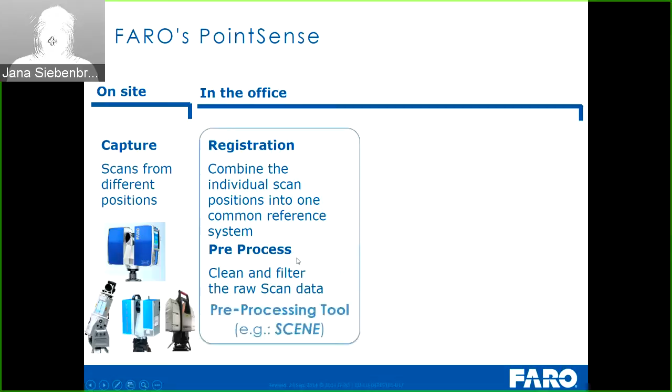Relating to scans, you will, in the office, or some may also already register their scans in the field - that means registration, you combine the individual scan positions into one common reference system - and also in the office you can pre-process the scan data. Pre-processing means that you clean and filter the raw scan data, and usually you would use a pre-processing tool like, for instance, FARO Scene to do so.

The post-processing, meaning interpretation and modeling, is usually done in a design tool like Revit or AutoCAD, and our PointSense is a plugin for AutoCAD. To get the data into AutoCAD and PointSense, you may directly export RCP or RCS files from FARO Scene, or you can also export E57 from any other scanner software, or you can use Autodesk Recap in order to create RCP or RCS point cloud files from your scan data.

So today we are talking about PointSense - interpretation and modeling of point clouds, not only from laser scans. FARO offers various tastes or flavors of PointSense.

There are some industry-specific PointSense products like PointSense Building for creation of 2D plans of buildings, like floor plans, section plans, and elevations. Then we have PointSense Heritage, which combines laser scanning and photogrammetry and is mainly meant for people working in archaeology and preservation of historical sites. We also have PointSense Plant, which will be covered in a separate webinar, as already mentioned.

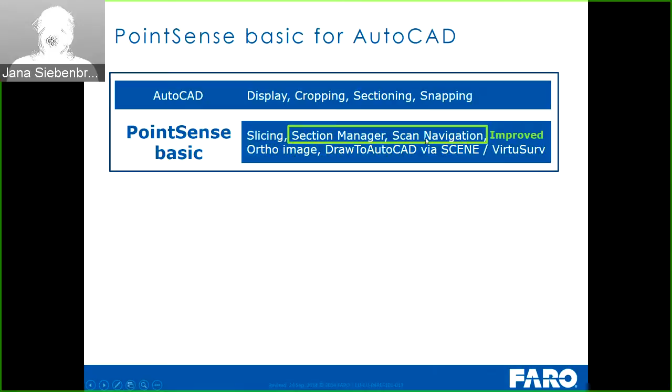We have in PointSense Pro some additional features like feature extraction for lines, polygons, planes, cylinders, and we have also some analysis tools in PointSense Pro. And as new features, we have added to PointSense Pro the Smart Snap feature. You will learn about it in a few minutes. And we also added a fit profile feature and some deviation visualization.

And also in the industry solutions of PointSense for AutoCAD, in PointSense Building and PointSense Heritage, we added new tools. Those industry solutions contain the functionality of PointSense Basic and Pro, plus additional functionality, like here in PointSense Building, tools for creating 2D floor plans and elevations, to draw doors, windows, stairs, etc., and do some area calculation.

And as a new tool, we have a prototype for aligning wall lines. You will learn about this as well in this webinar. We also improved the tool for creating the wall lines themselves.

In PointSense Heritage, you get, in addition to those PointSense Pro tools, tools for stereo photogrammetry and for creation of image plans by unwrapping colorized point clouds into the plane. You will learn about this tool also in this webinar. We did some improvements there. They are not new tools. We have them for quite a while now.

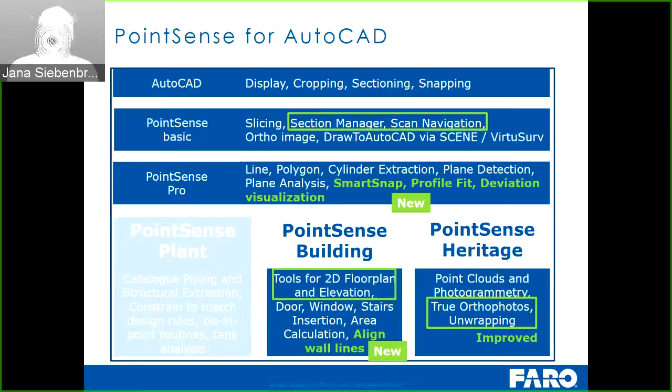And some of you might also be interested in which AutoCAD versions the new version of PointSense is compatible with. So we have here a list of the supported operating systems and AutoCAD versions. We always support the latest AutoCAD version, which is now 2017, and also the verticals of this AutoCAD version, and the new version of PointSense also supports older versions of AutoCAD, starting with version 2013.

It does not support AutoCAD LT because we are relying on the native point cloud engine of AutoCAD, and LT does not have such an engine. All right. So far about the brief overview. Let's have a look at the new features and their benefits for you.

The first feature I like to mention is the Smart Snap, which is really new in version 17.5. It works like the known AutoCAD object snaps. With it, you can precisely snap to planes, corners, and edges of a point cloud. And we have also options that allow you to snap to the highest or lowest point within a certain search radius. The benefit for you is that Smart Snap allows you to draw and model the as-is situation much easier. You have far fewer clicks for getting corners and edges.

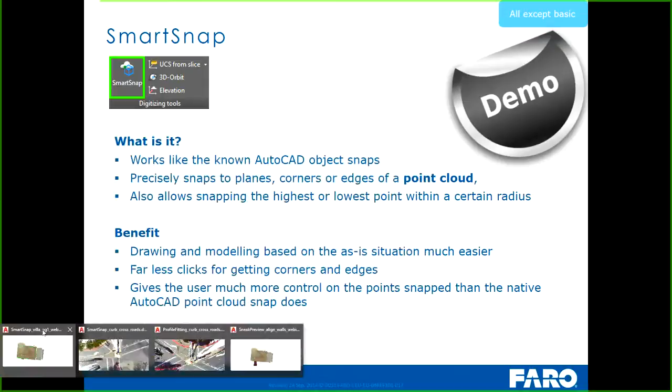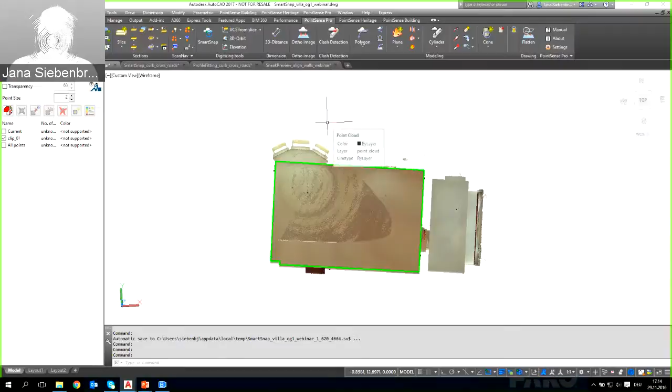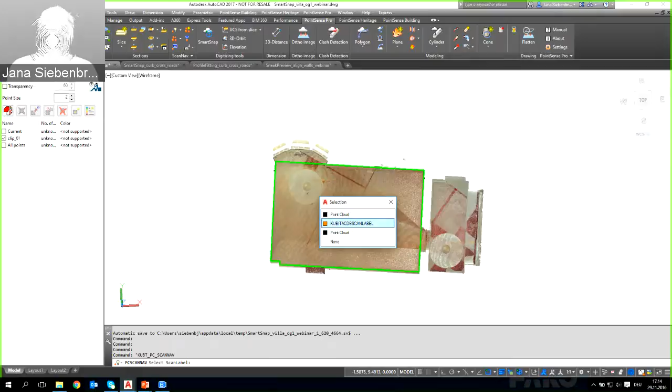So here you can see a point cloud, a scan of 2 rooms. I have already digitized the ceiling outline of the left room, and what I'd like to show you besides the Smart Snap tool is an improvement we made when switching to scan navigation. If I click on it, you will notice that now the point cloud becomes transparent, so it's far easier to click the scan label of the scan position which I want to go into perspective view.

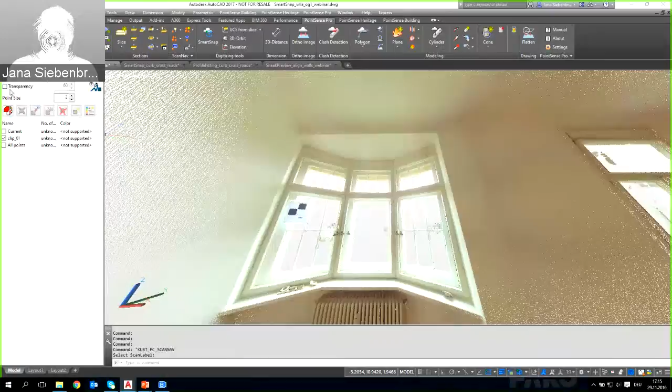So here we have our scan data now in a so-called scan navigation mode, where you look at your object from the scanner position. And what I'd like to do now is to digitize the outline of this window recess. One more thing I'd like to show you is a smaller improvement in the section manager, which some of you might know already. There, whenever you need to, you can turn on transparency.

Here you can see now the line that I have already digitized. For digitization of the recess, I will turn transparency off again. And I will start the new Smart Snap tool.

By running the tool, you will get an additional toolbar for the Smart Snap, where you can turn it on and off using this button. And you can also change between auto mode and manual mode. We have different types of snapping modes, like point to plane, corner point, edges and corners, or only edge points, and highest and lowest.

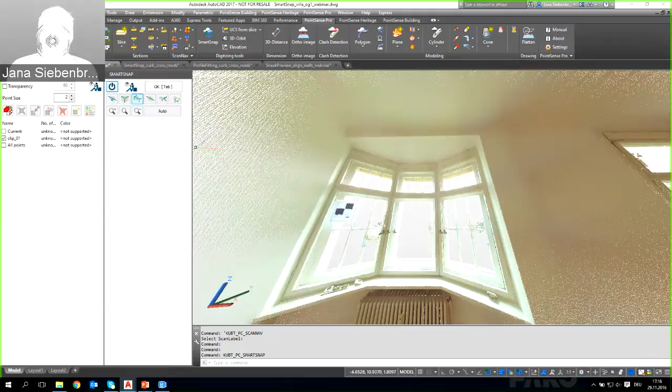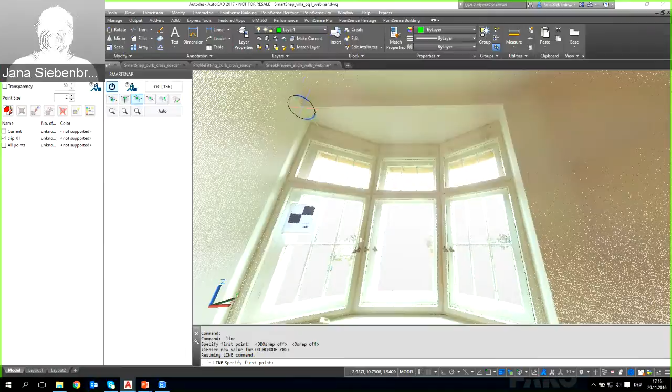Let's digitize the recess using the edge and corner snap. I would just draw a line to outline the recess. Let me just enable a colorful layer, and I start the line command, and you can see at my cursor, I now do have a circle around my mouse cursor, which represents the search radius. I can scroll it smaller and larger, just to analyze the points within a certain area.

And when I click near the edge or the corner point here, I do get a visualization where I can check. So the green point would be the point which I would get if I used auto mode, but the blue points show me some alternatives which I can check in 3 different views. And I think this one looks quite good in all 3 views, and you get additional axes that help you judge the quality of the proposed point.

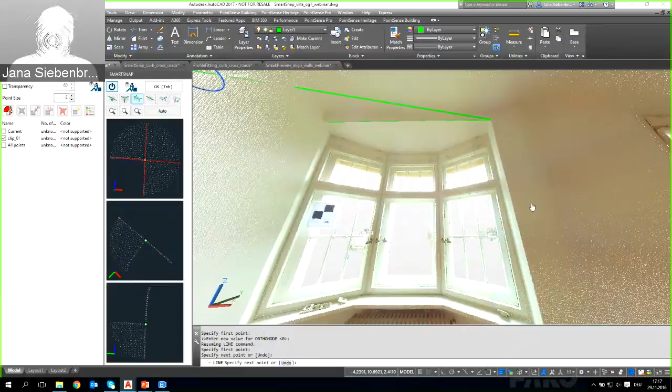And if I think this is the correct one, I can click on OK or use the tab button on my keyboard, and you see the line was snapped to that point, and I proceed with the next corner over here. Again, we can check. To me, it looks pretty good already. Let's see how this looks. Well, maybe even better. So I confirm, and I could continue down here and see what happens.

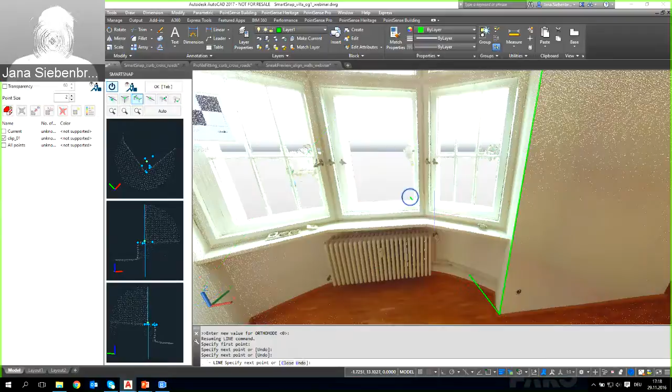This is a little bit more complicated situation down here, but still, I would like to get a point very close to here. This looks okay to me, and I can confirm here. So I think you get an idea of the usefulness of the edge and corner point snap.

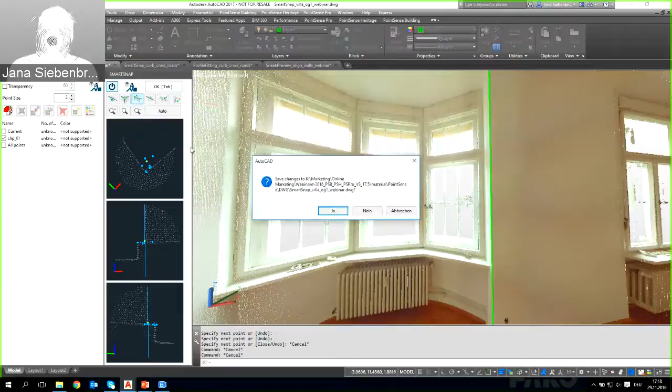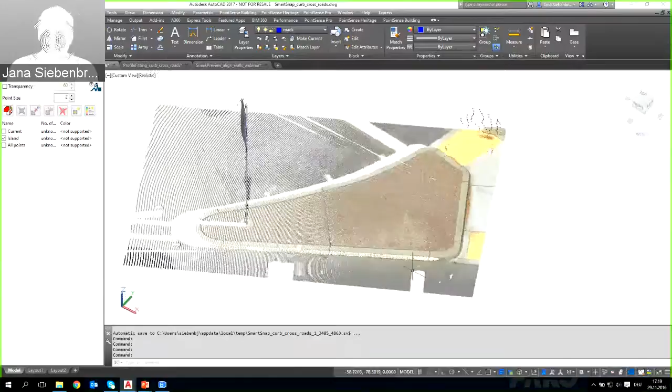Let me show you. We have 2 more options, like highest and lowest point snap. I will demonstrate these on a different example. Let me just close this drawing. Here we have scan data of a road cross section, and what I'd like to digitize is the bottom line of this curb using the Smart Snap. So I run the tool again,

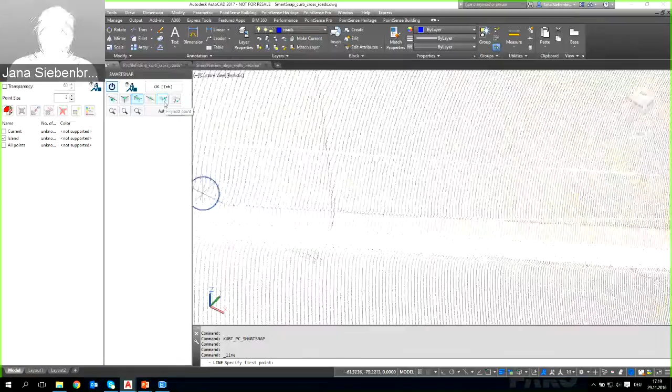and here I think I will start the line command once more, and I would need to snap to the lowest point within my search radius. So I enable the lowest point snap, and we have 2 options: the projected lowest point and the real lowest point. So now the projected lowest point is enabled, and this is also what I really need. Let me just increase the search radius a little bit,

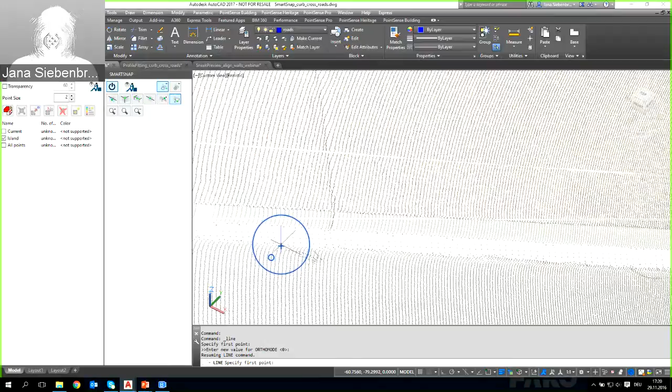and you can see a small blue cross inside my search radius, and you can also see a little circle. The little circle shows me the point with the lowest Z value within my search radius, while the blue cross shows me the point where I get my XY coordinates from. So I get the Z coordinate from the point with a small circle, and the XY coordinate from the point with a cross. So I can start drawing along here.

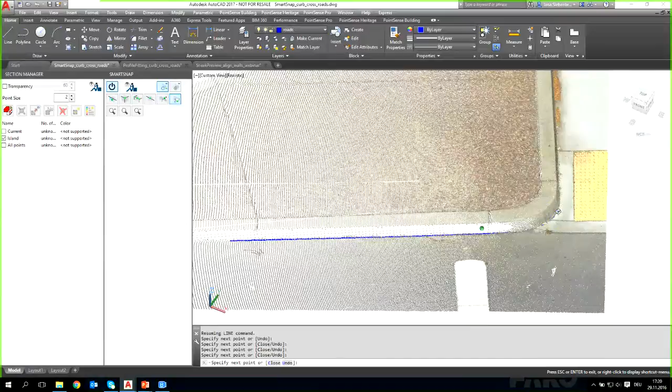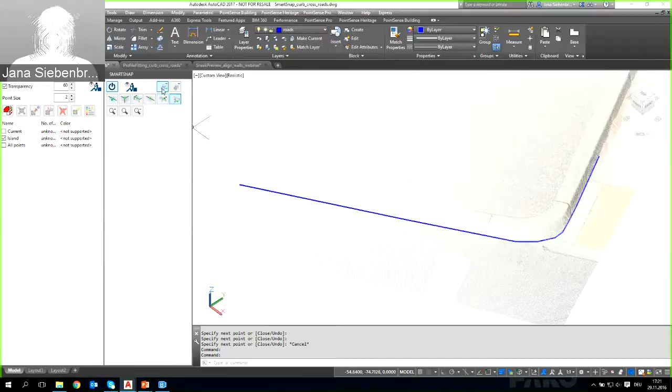Oops, I want to pan. Just click roughly around this corner. Quite straight on over here. Okay, I think that's enough for you to get the idea. We turn it a little bit more transparent, so you can see how easy it is to draw the bottom line of a curb. The same way I could do with the top of the curb using the highest point snap, projected highest point.

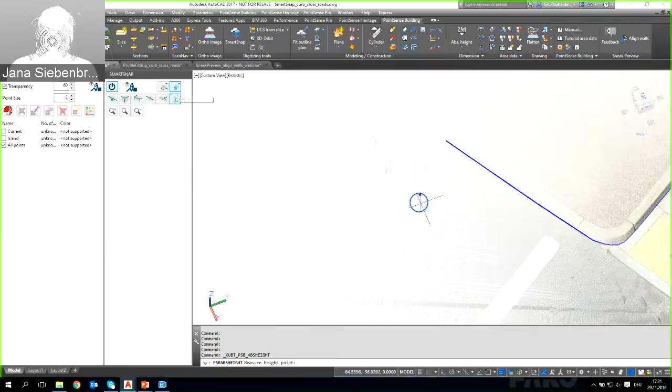I'd also like to show you how you can use the other mode, with the real lowest point. If you, for instance, want to know in a certain area of the road where the water will run to, you can, for instance from PointSense Building, start the labeling tool for heights or elevations, and with the Smart Snap now the real lowest point enabled, you can see that the symbol changes a little bit.

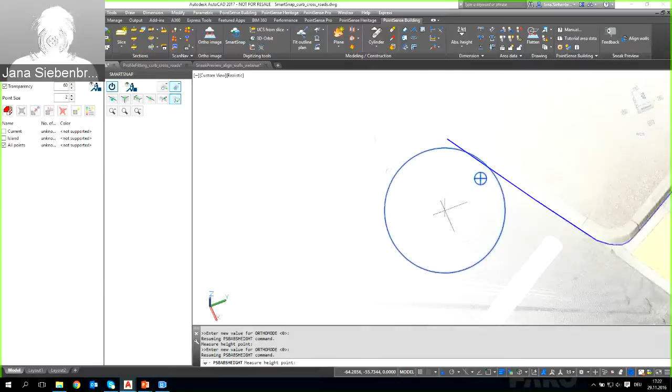The small blue cross is directly inside the small blue circle, which means that you get the X and Y as well as the Z coordinate from the lowest point within that larger search radius. So if I want to analyze a larger area, I can enlarge the search radius, and my height annotation will be put to that snap point. Okay, I think that should give you an idea of the Smart Snap tool.

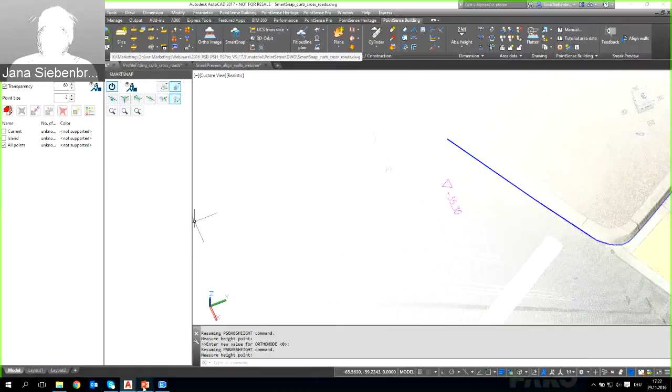I will just continue with the next feature, which is also new in version 17.5 of PointSense. It's included in all PointSense solutions except PointSense Basic.

It does fit 3D profiles along a point cloud, and shall help you to model all types of profiles in 3D, like the 3D model of a curb or of ornaments, or even if you have steel beams that bend, you can model those beams with this tool as well.

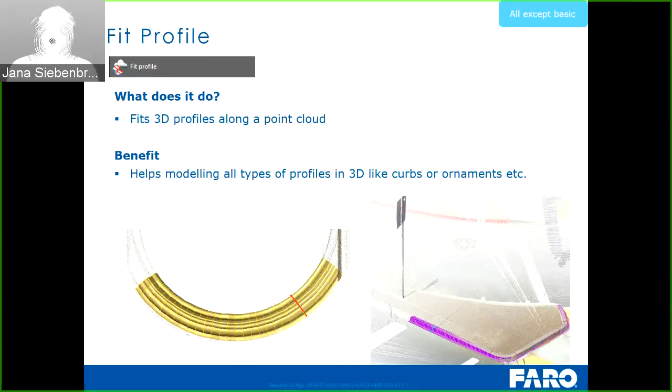Yes, I was going to mention the steel beams if you didn't mention it. I had a customer that needed that, and it worked very well for them. Yeah. And yet another application where I found it useful was for digitizing railway ties. We had a customer with an electrical substation, had train tracks going through, and were able to model it very well with this tool. Oh, cool. Good.

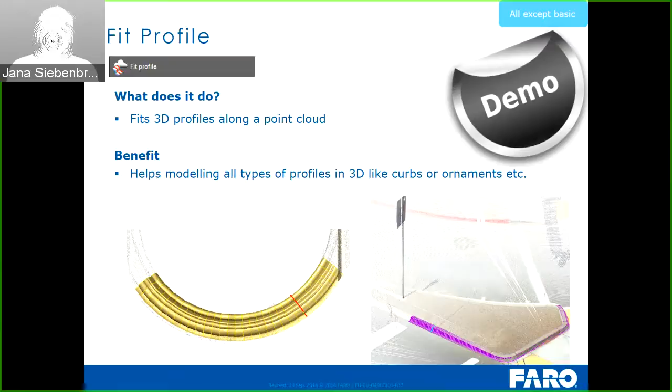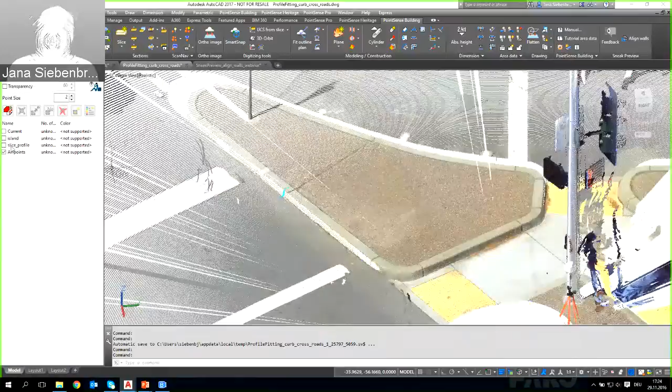So I will just go back to AutoCAD to give you a brief introduction to that tool. It's really easy to use. In here, it's the same road cross section example, but this time we don't want just the lines of the curb, but we want to model this curb in 3D. What I did, in preparation, I created a slice through the point cloud and digitized the cross-section profile of the curb. That's what you need before you start.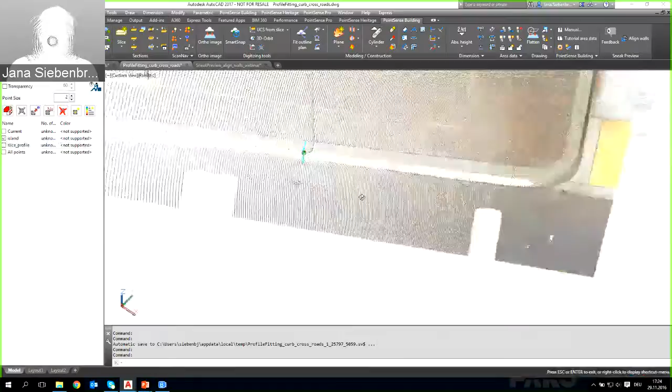And having prepared this, I can run this command in PointSense Building. You find it here. In PointSense Pro, it's hidden in this pull-down menu. And the dialog works a little bit like a wizard. So the first thing you have to do is select the cross-section profile. Here you have a small sketch that helps you understand what's asked now. And as soon as I've selected the profile, we're back in the dialog with a check mark here.

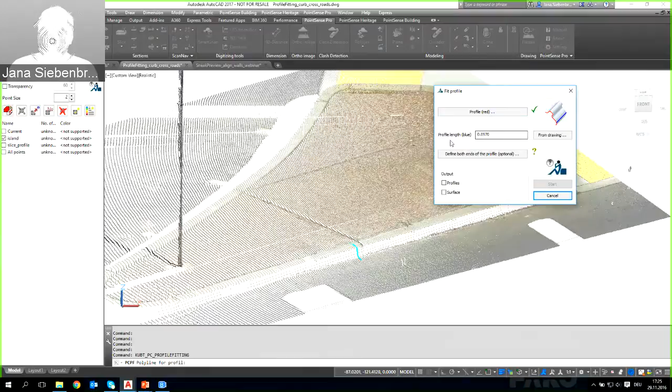And the profile length is a parameter where you can control the fitting accuracy. The smaller the profile length is, the better you get around curved parts of the 3D profile, like this curved part of the curb here. I would just leave it like it is. That's given from the software in relation to the red cross-section profile.

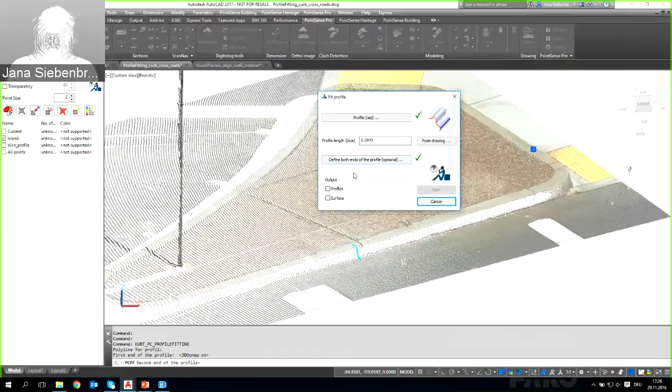What you can also do is define ends of the resulting 3D profile. You can snap a point cloud starting point here and end point over there. If you don't define an end point and a starting point, the tool will just go along the point cloud as far as it finds some area where the profile might fit, and you can stop the fitting by pressing escape at any time.

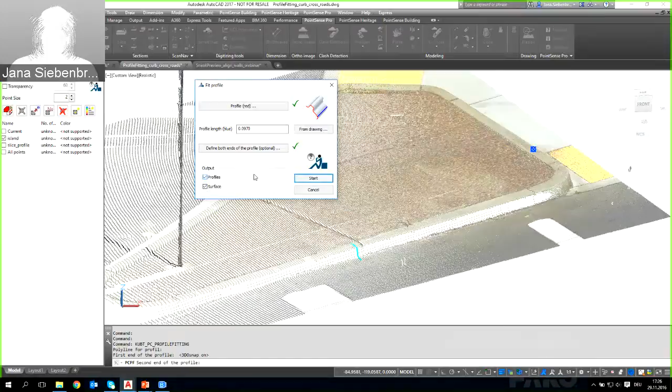And the output we want to create are, for demonstration here, profile lines as well as the final 3D surface. And I just click start, and you can see this is really real time. The profiles are fitted very quickly. It starts to one direction, and once it reached the endpoint, somewhere there around the corner, all right, it will continue to the other direction of the selected cross section.

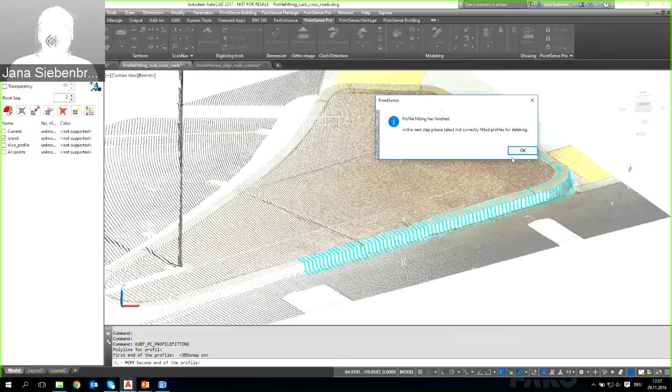And now I'm asked to delete any profiles which I don't need. So I could select some profiles over here, which I don't want to use to create the 3D surface. And in this example, all the cross sections fit very nicely, so I could keep them. But in some cases, if you don't define a start and end point, then some additional profiles might be created that you don't want to use for creation of the surface. Therefore, we have this option to delete some of the profile lines.

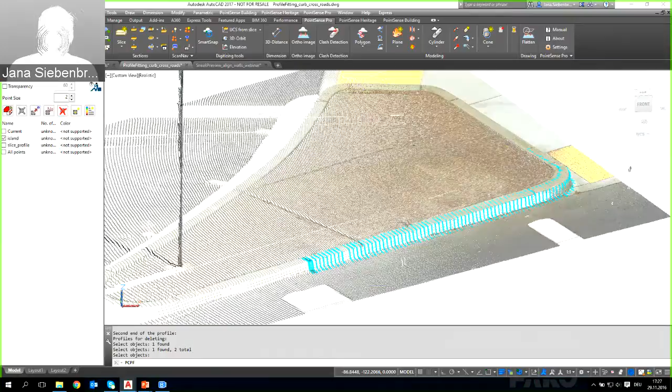And now you see this was also real time here. In just a few seconds, the tool creates a 3D surface from all these profiles, and you have the curb in 3D. All right.

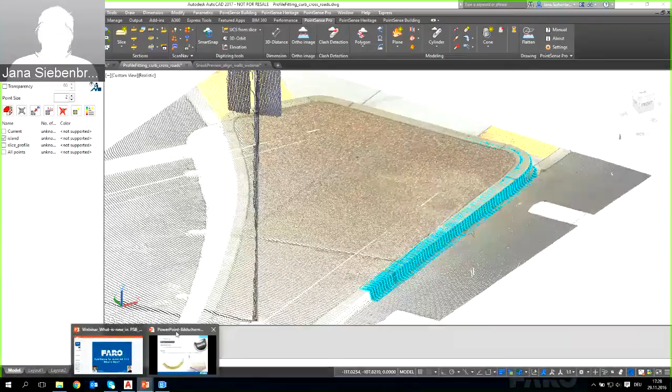I will not demonstrate this tool. It's pretty easy. You just select the geometry objects that represent the surface, and then select the point cloud, and it calculates another new point cloud, which is then colorized by deviations, and you get a legend in the end. And it's very similar to our existing planar analysis tools, and the results are pretty much the same. But what I like about it is that you can model anything that you want or need in the point cloud, and then compare that model to the point cloud. Right.

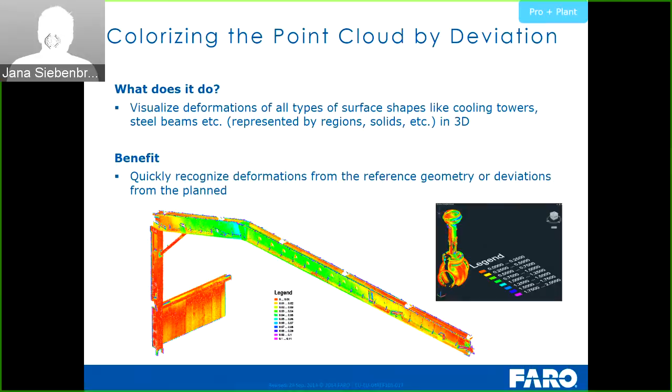Okay. Another one of the completely new features in PointSense is the Align Walls feature, which we only have in PointSense Building. And so far, this feature is just a prototype. In PointSense Building, we introduced a new feature group called Sneak Preview, and this is a category of features collecting prototypes.

We think they are good enough to let you try them, get your hands on them and give us feedback. So the sneak preview features are your chance to participate in early developments at FARO in PointSense. You can benefit very early from new developments, and you have the chance to influence the future functionality and enhance the features by your feedback. So that's mainly what the new sneak preview is.

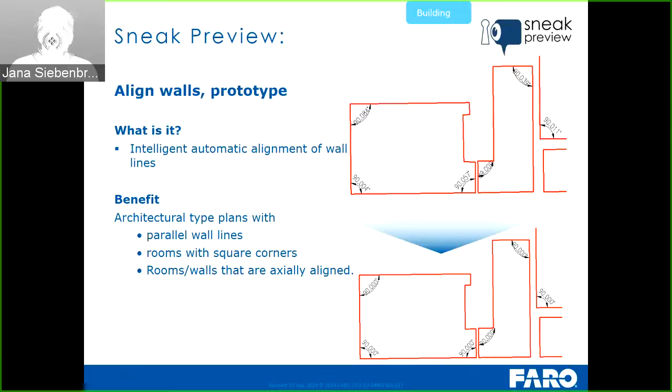The tool works as follows. First, you select all the lines that you want to align or make perpendicular, and the tool then analyzes those lines and polylines, determines the reference directions, and then aligns the lines with these reference directions within a customizable tolerance.

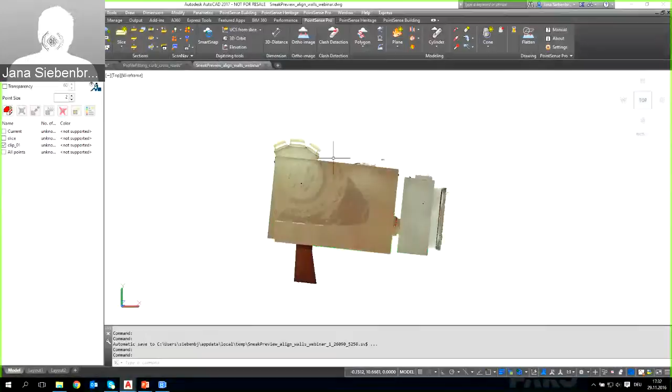The best thing to give you an idea of the tool is maybe a demonstration again, and we go back to AutoCAD here. Here we have again our two rooms which we scanned, and the supposed workflow would be that you first create a slice of your point cloud and digitize the wall lines.

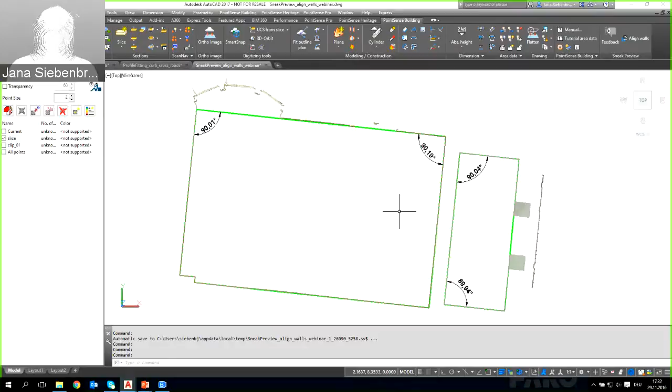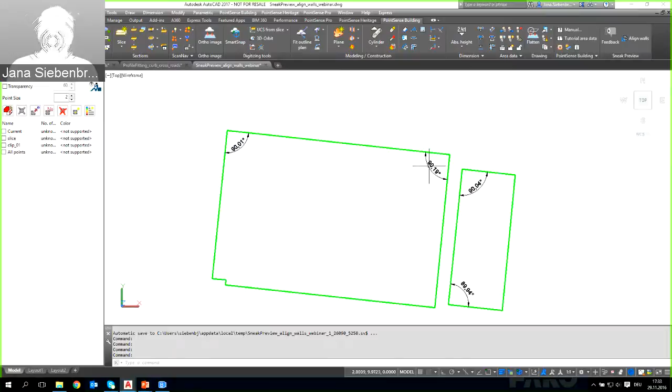Before you add doors and windows, you would want to align the wall lines and apply constraints like square corners for the rooms. And that's what we can do. I have put in some annotations here, and you can see that the room corners are not square right now, but using the new Align Walls tool, you can select those lines, enter to confirm the selection, and then here you can set increment angles for the alignment.

The default selection is 90 degrees, but if needed, you could also apply constraints like 45 degree angles between the wall lines. You have various parameters to adjust the wall alignment. The maximum deviation for axial alignment of wall lines is especially of interest if you have scans of the outer side of the wall of a building, for instance.

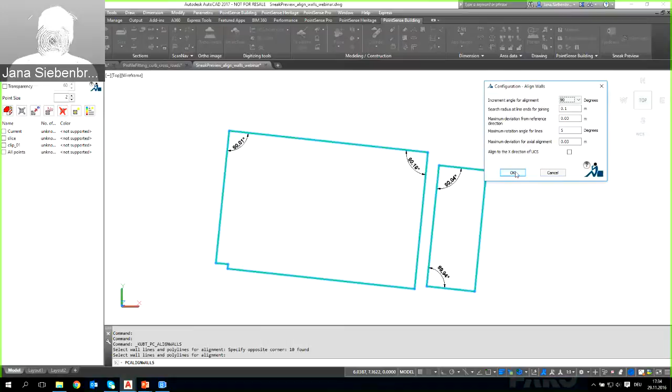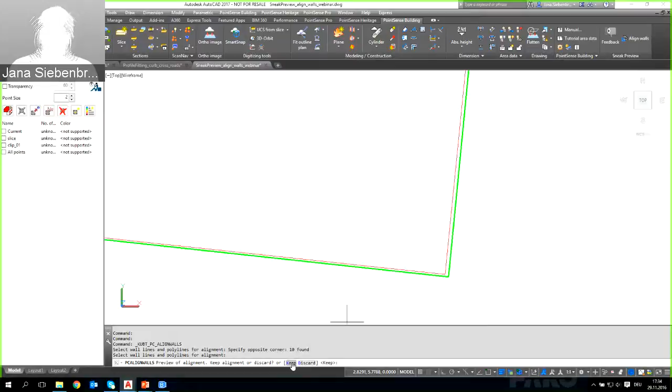I would just hit OK here, and in the command line you're then asked. In the drawing you will see the proposed adjusted lines in red, and you have the option to keep them or discard them, and I want to keep them, of course. And you can see now we have new lines.

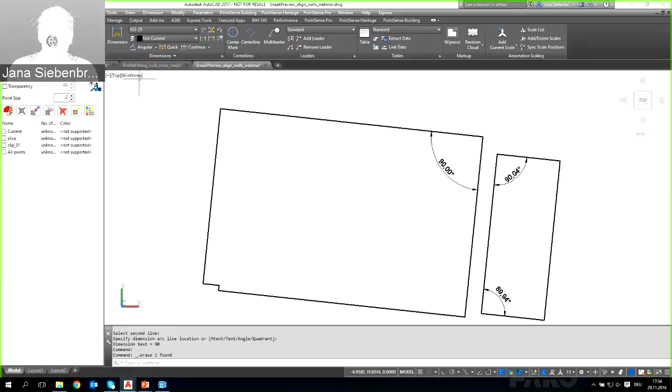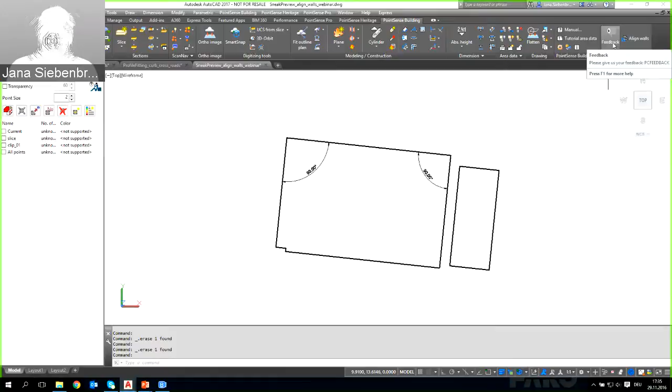After applying these constraints, you can continue adding doors or windows or even stairs, depending on what you need inside your floor plan. With the new sneak preview, you also have the option to give feedback. Let me show you this briefly. If you hit the feedback button, you will get to a web page where you can leave your feedback on the particular sneak preview feature. For now, we only have the Align Walls feature where you can give feedback. Okay.

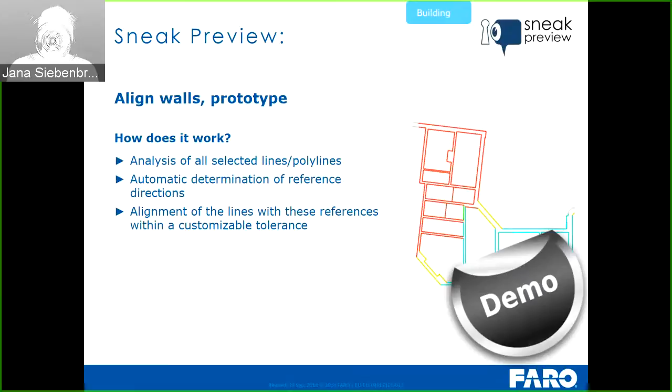What else have we done to improve PointSense? We improved PointSense Heritage. We improved the creation of image plans, especially for unwinding point clouds and images, and the calculation of true orthophotos. We have increased the speed; the calculations were quite slow before.

You also need fewer clicks because we now directly support RCP and RCS point clouds. You don't have to create a smart section first. You can directly select your RCP file to unwind it. And also the visual quality of the results has been improved.

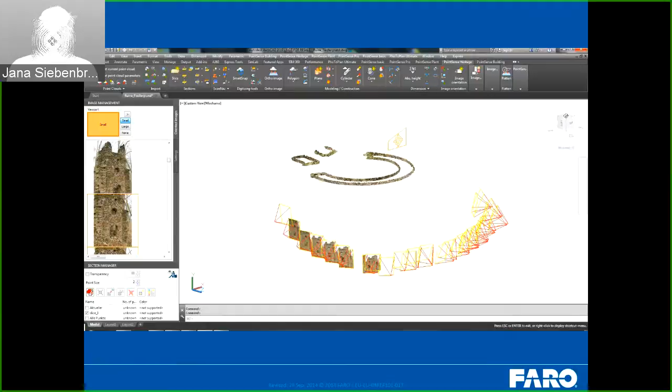Because the calculation still takes longer than 1 or 2 minutes, I have prepared a video to give you an idea of how the unwinding feature works. Some of you might already know it. Before you can unwind anything, you have to create a projection surface for the photographs or for the points of the colored point cloud.

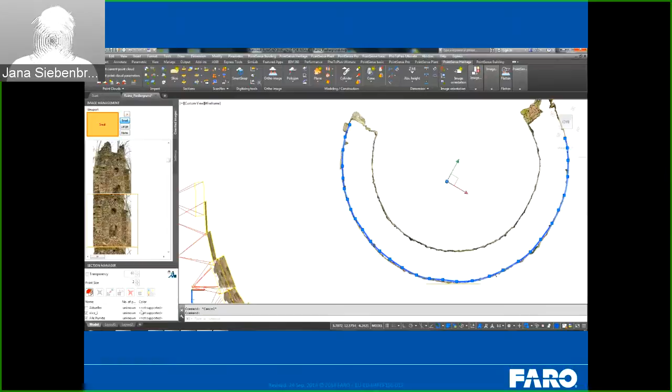So we have defined the slice, and we fit a polyline to this point cloud slice. This is in time-lapse mode. Once we fitted the polyline, we can use it to create a 3D surface from a 2D polyline using a PointSense Heritage tool called Edit Prismatic Surface. We select the polyline, click an upper and lower point, and we have the projection surface.

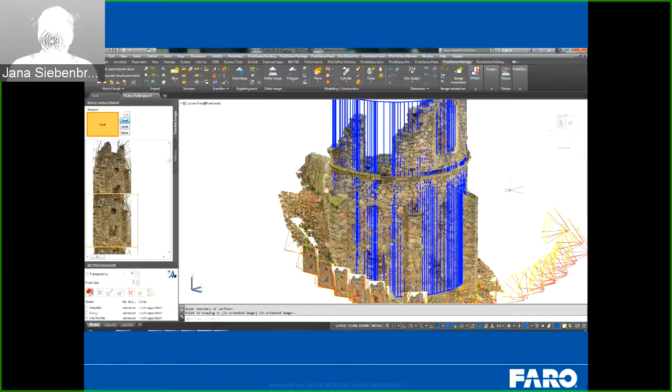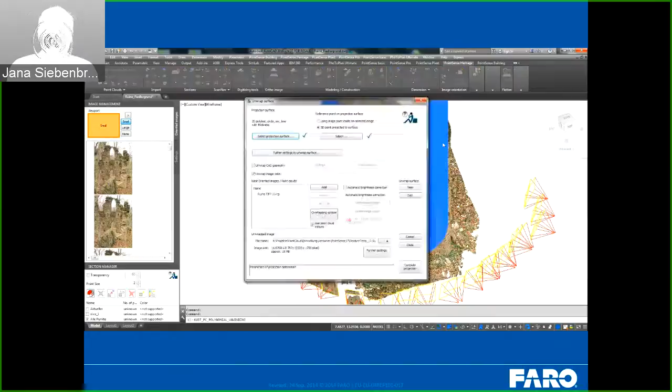Then we can run the Unwind Surface command from PointSense Heritage. You need to select the projection surface; that has been done here already. And you can see the RCP point cloud has been selected. When you run the calculation, you get a result like this, which looks pretty good, I think.

Having created a true to scale, true to length image plan, you can of course use AutoCAD tools to annotate, do measurements and maybe draw a vectorized facade plan on top.

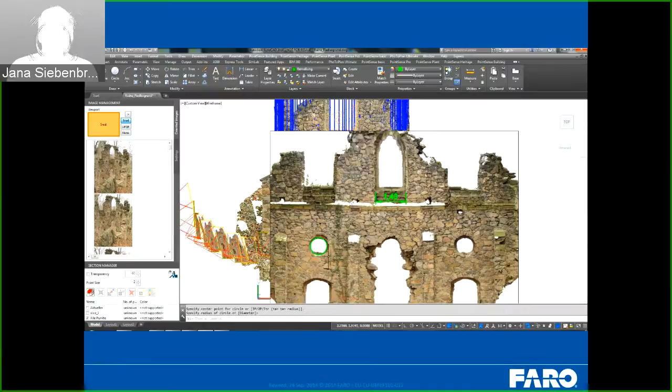Okay, another improvement which I have already demonstrated when I talked about SmartSnap is that in our section manager we have now a transparency option and also an option to change the point size without needing to select the point cloud explicitly. You can turn the point cloud on, transparency on and off while you are drawing and modeling, and this helps you a lot with modeling.

Yes, it is. It is much faster to have the tools right there, just on the side of your model space, and be able to change that in the middle of any command without breaking the command. Yeah, exactly. And another improvement with the help of transparency, I also already demonstrated, and this is when you want to turn on scan navigation, the point cloud automatically gets temporarily transparent, so you can much easier select the scan labels of the scan positions.

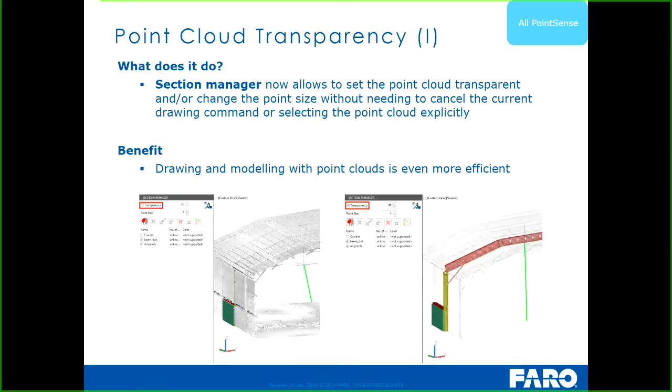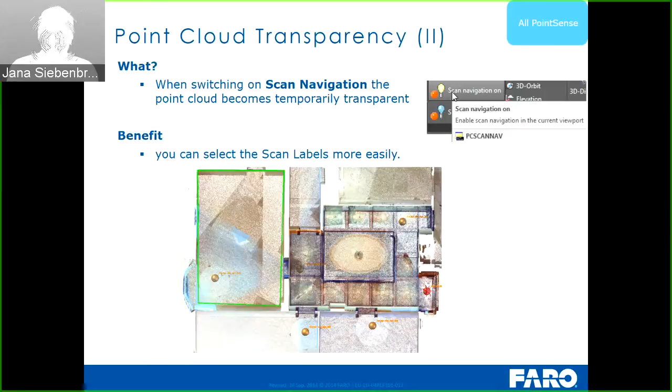And also, we have now the possibility to explode the scan labels for users that, for any reason, need a scan map. For somebody who does not have PointSense inside his AutoCAD, or who is using a different CAD like BricsCAD, and you want to provide them with a map of the scan positions, you can just create the scan positions in PointSense and then explode them and export the DWG file or DXF file with the labels just represented with standard CAD geometry.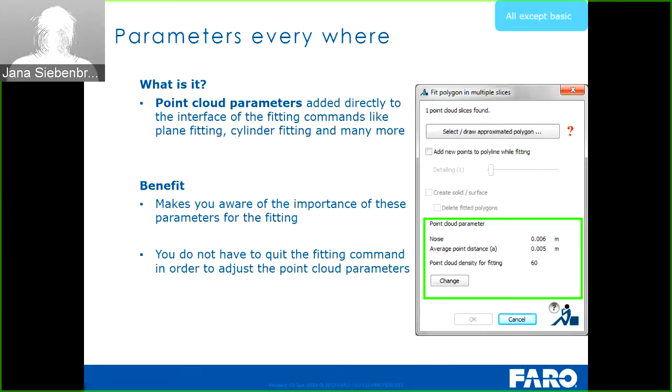Another improvement we've done to PointSense is that we put the point cloud parameters directly into the fitting and pattern recognition tools of PointSense, like plane fitting, cylinder fitting, and many more fitting commands. You will have the point cloud parameters directly in there. It helps you to be even more aware that these point cloud parameters matter for the results of the fitting tools. And also, you don't have to leave the fitting tool itself if you feel like you need to adjust the point cloud parameters for a certain area of point cloud you're working on. So you can adjust those parameters directly from inside your fitting tool, which is quite handy.

Then we also revised and improved the old fit outline plan command. This is a command that helps you to draw the outlines of walls with the help of point cloud sections, point cloud slices. But not only with the help of point cloud slices, but also with the help of scan navigation, it's now possible to draw the wall outlines. It offers more options like forced perpendicular or 45-degree wall lines. It's working more efficiently, and if you try it out, you will recognize you will need far less clicks than in the previous version of this tool.

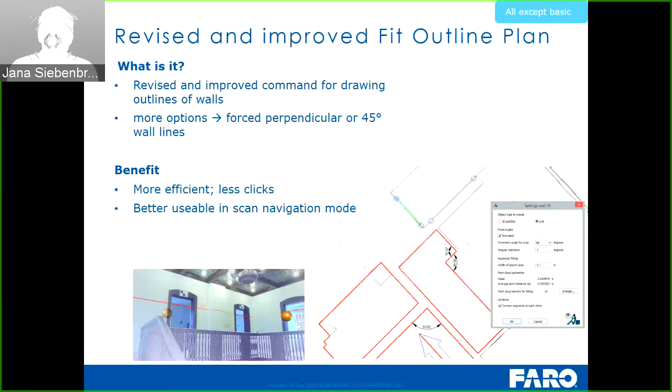On user request, we also did various improvements on our analyzer tools, like the plane analyzers. You will now find options for labeling the highest and lowest deviating point from a reference surface, which you can see an example here in this cyan colored annotation. And we also added in the dialog a checkbox for the square grid. So you don't need to enter 2 grid lengths, just one if you want to have square cells for your analysis grid.

And also new are these green and yellow labels to the rows and columns of the grid, which correspond to the cell numbers in the ASCII file, which you can also export with the analysis tool. Those labels help you to better find correspondences within the deviation table from the ASCII file. Yes, this is a great improvement to help tie in data that's outside of CAD, perhaps in an Excel file, and help those engineers find out where that would physically be, let's say on a wall surface. Very helpful in the paneling industry, also good for any sort of flatness analysis like concrete analysis.

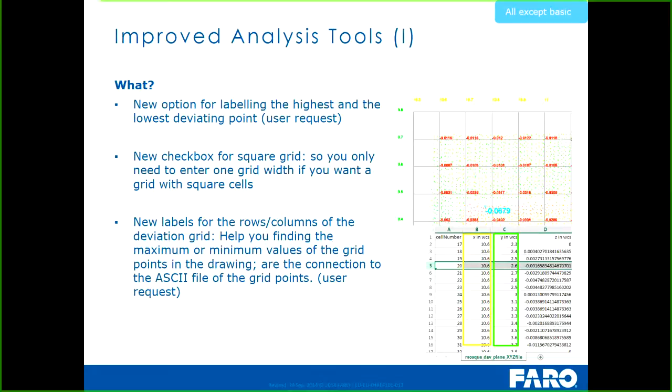Yes, and another improvement in the analysis tool is that we have now provided you the option to organize your results more easily. So we have prepared some configuration tools to define layers to put the different analysis results on, and you on your own can define the name of those layers where the grid shall be put on, or the points or the lines, etc.

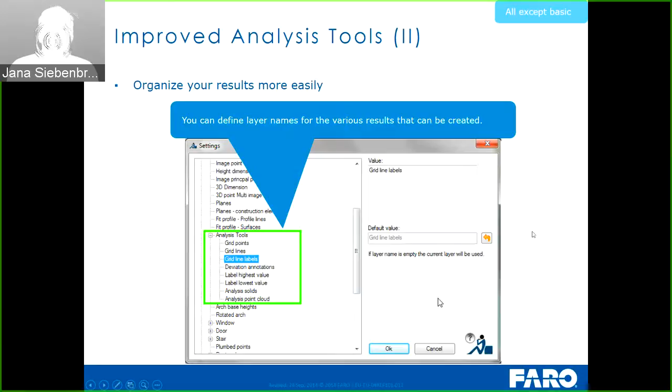We have included two new command line options that help to change the search radius around the click point without needing to go into the parameter dialog.

And inside the parameter dialog, we added options for limited and unlimited plane, which makes the tool a little bit more flexible on the results created.

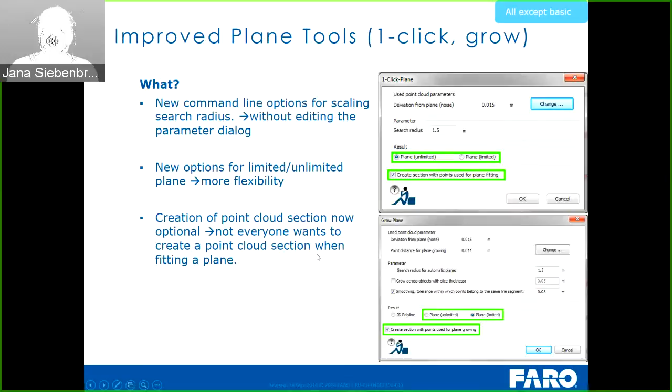Another thing we added is the option to create or not create sections when you use these tools. Previously, both tools always created point cloud sections in the section manager, and if you use the tools very often, the section manager could become very crowded. So if you don't want those sections to be created, you can now uncheck this option, and your section manager will stay clean and uncrowded.

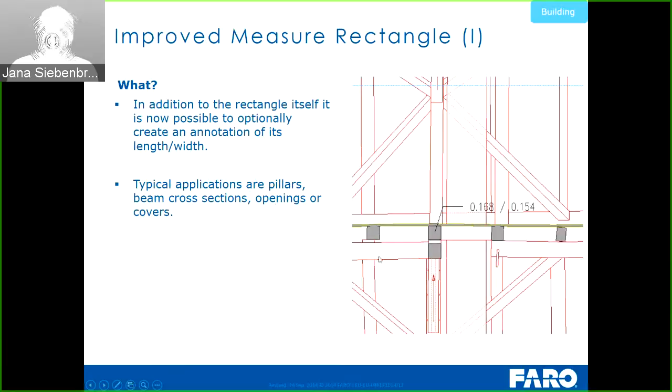In PointSense Building, we did some improvements to the tool for measuring rectangles. Now, in addition to the rectangle itself, you can create annotations of the width and the length of that rectangle you created, which comes quite handy when you draw pillars, beam cross sections, openings, covers, or anything which is rectangular.

Okay, those were the features which I wanted to introduce to you today.

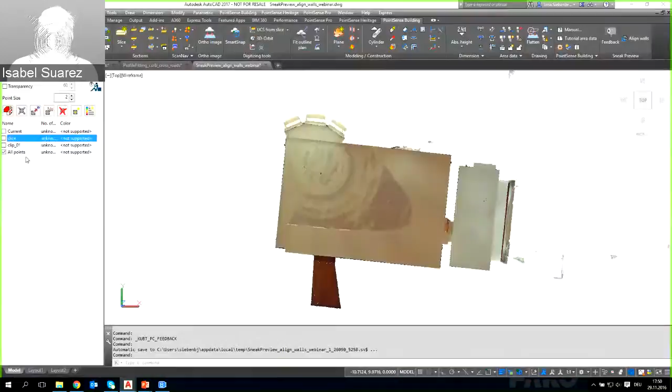Multiple slice wasn't one of the new features, it's one of the existing ones. I believe we have a video of that online, but if you want to show it, you can, or we can send a video. Yeah, I think it's easiest to send a video, but let me just go to the clip here. Multiple slice is hidden in the drop down over here.

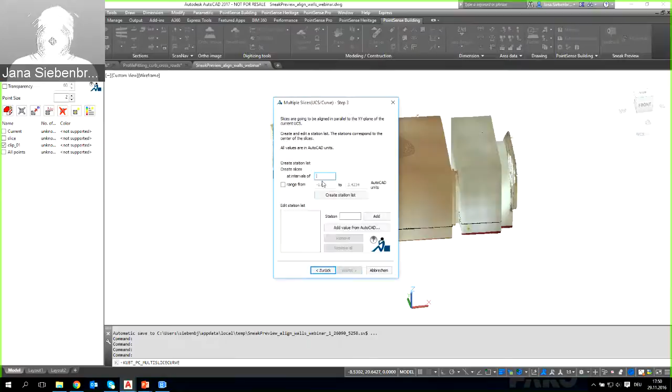You can decide whether to apply it on the visible section only, and we will just create multiple slices parallel to the XY plane for demonstration here. We can add intervals, I think, to make it not too many, let's say 0.5 meter, or maybe just 1 meter, to give you an idea of how it's working. Create a station list, can even adjust things here.

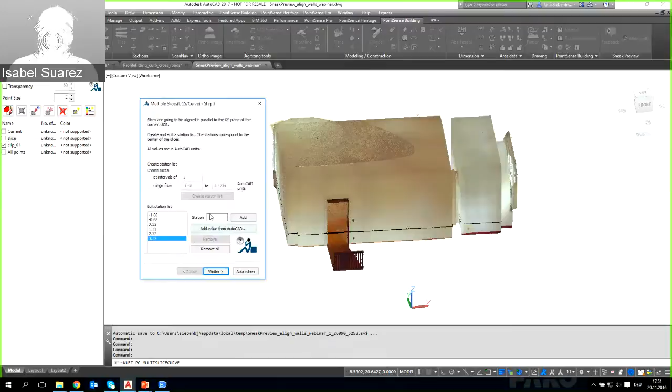Or add specific elevations. If you wanted to know a specific elevation, like at a counter height or something, you could type that in there, or pick it from CAD, like over here. Then it's added in here.

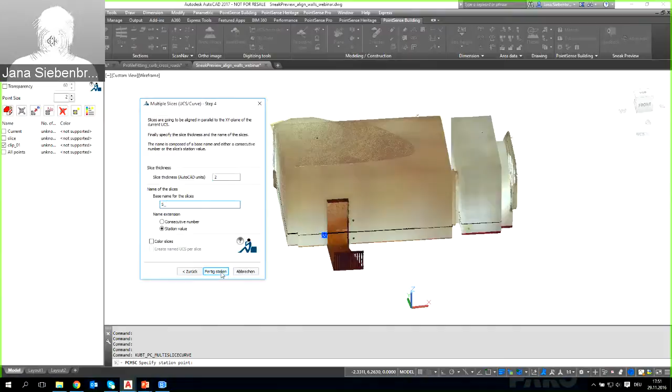You can continue, and you can name the slices by station value, which I usually select. We don't color the slices here; I think point cloud color is fine. Then I'll just click on finish, and it should not take too long to create.

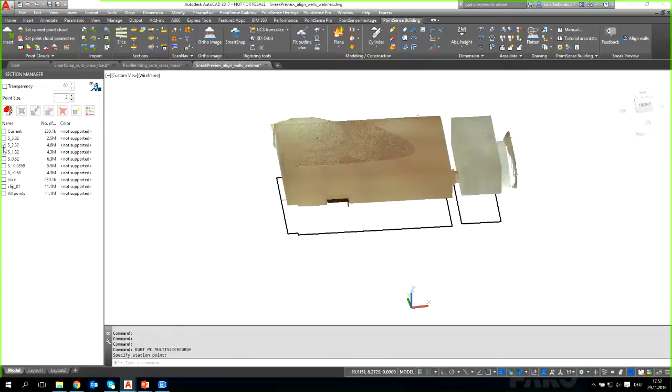How many was it, 6 or 8? 6 or 8 slices, yeah, so we have them over here. I think it's just because the interval was the same as the thickness, but you can also modify. Okay, I didn't modify the thickness over here, yeah, that's why it's so thick.

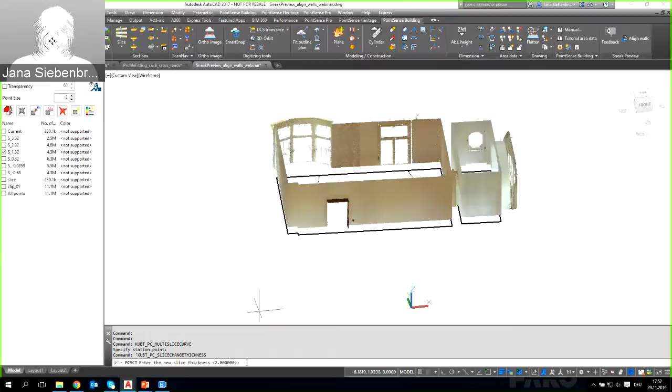But you can always reduce the thickness going in here. Yeah, it was 2 meters thickness. Woo, that's far too thick. I think you got the idea of the multiple slice tool.